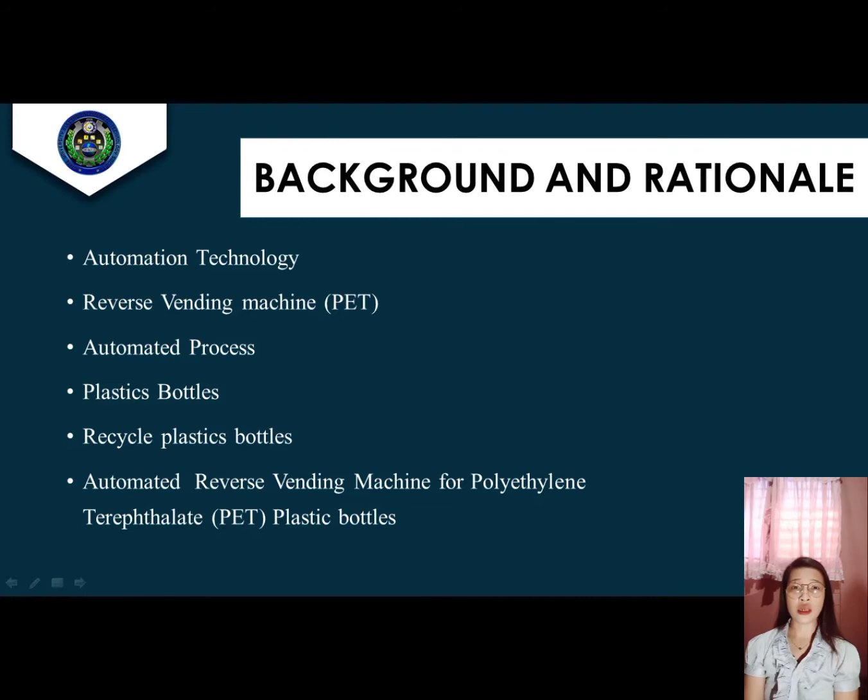Another contributor to the growing post-consumption plastic waste problem is the lack of proper waste management infrastructure. The study highlighted key areas where plastics are leaked into the oceans, and this includes rural areas that do not have a proper waste collection method due to low waste density, and high-density urban areas that are not able to cope with the influx of development.

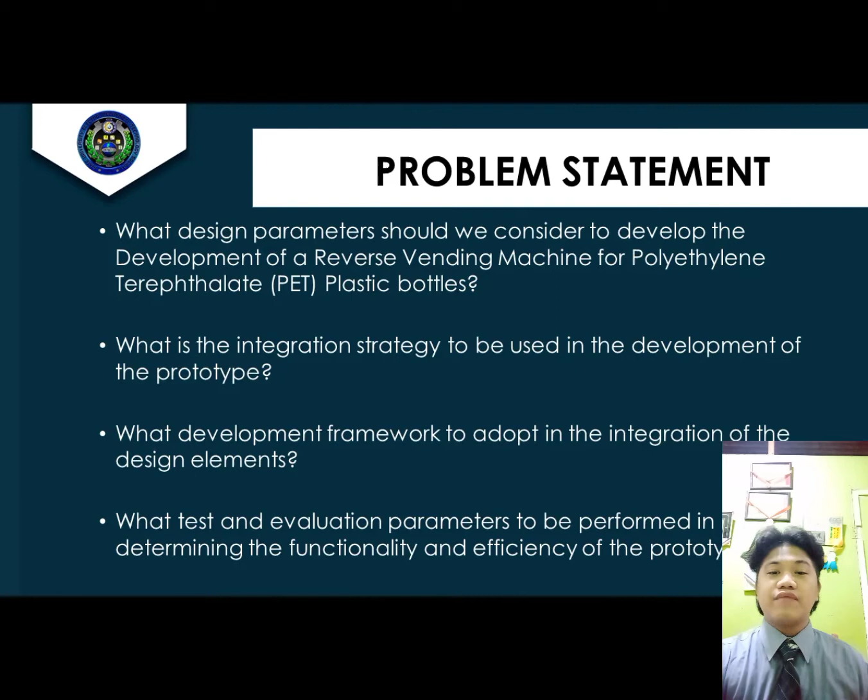Statement of the problem: What design parameters should we consider for the development of a reverse vending machine for PET plastic bottles? What development and implementation strategy should be utilized to ensure the development of a reverse vending machine for PET plastic bottles? What evaluation parameters should we assess in order to measure the performance and acceptability of the development of a reverse vending machine for PET plastic bottles?

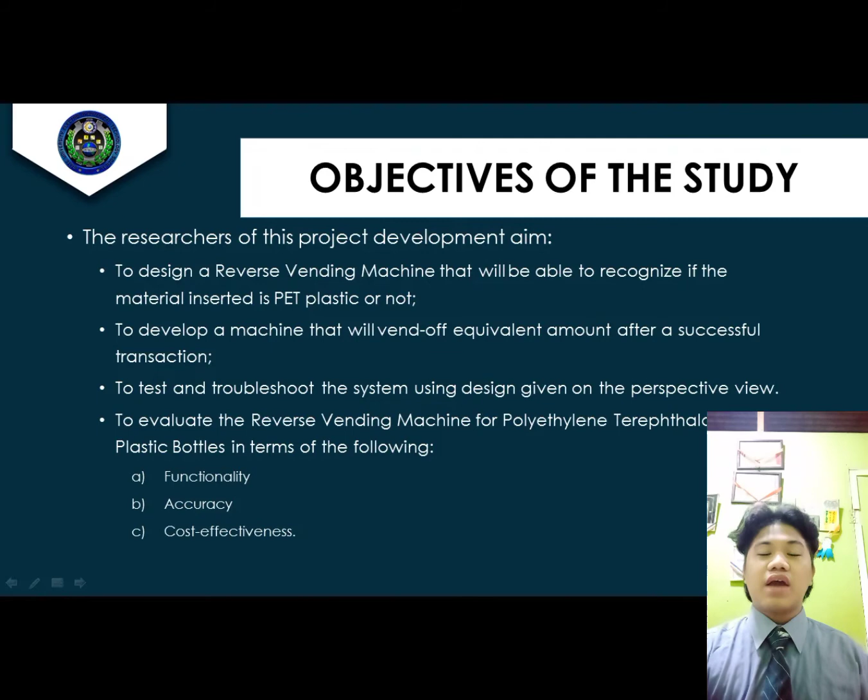Objectives of the study: To fulfill the main objectives, the following specific objectives should be met. To design a reverse vending machine that will be able to recognize if the material inserted is PET plastic or not. To develop a machine that will vend off an equivalent amount after a successful transaction. To evaluate the reverse vending machine for PET plastic bottles in terms of: A. Functionality, B. Accuracy, C. Cost effectiveness.

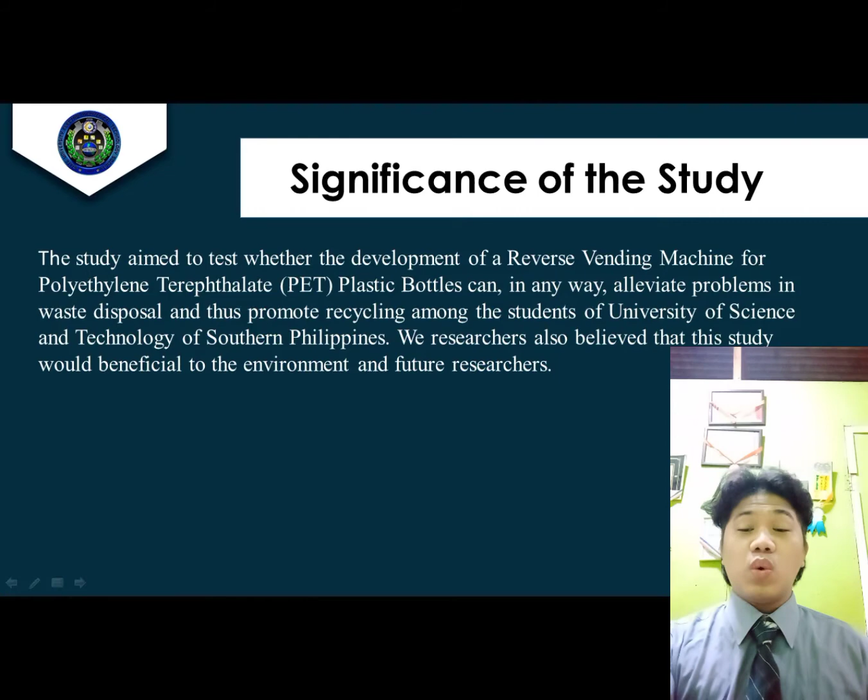Significance of the study: The study aimed to test whether the development of the RVM for PET plastic bottles alleviates problems in waste disposal and thus promotes recycling among the students of the University of Science and Technology of Southern Philippines. We researchers also believe that this study would be beneficial to the environment and future researchers.

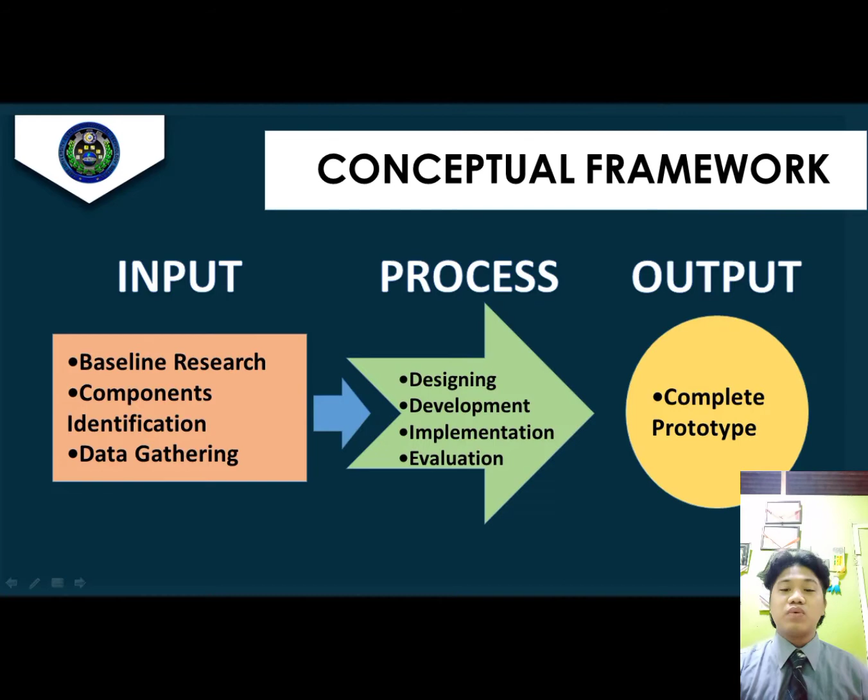Conceptual framework: This is our process flow, which has an input—determine all the possible materials and equipment to use, collect all materials and equipment, gather all data of materials and equipment; a process—design the RVM, applying various procedures as guidelines, develop a prototype for the RVM, evaluate the RVM; and output, which is a reverse vending machine for PET plastic bottles.

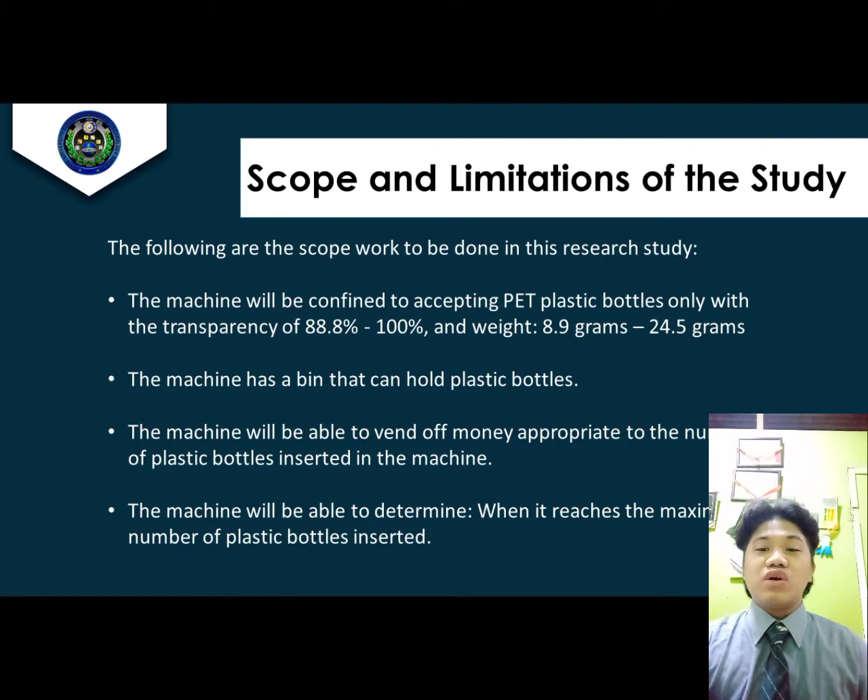Scope and limitation of the study: The machine will be confined to accepting PET plastic bottles only, with transparency of 88.8% up to 100%, and weight 8.9 grams up to 24.5 grams. The machine has a bin that can hold plastic bottles. The machine will be able to vend off money appropriate to the number of plastic bottles inserted. The machine will be able to determine when it reaches the maximum number of plastic bottles inserted.

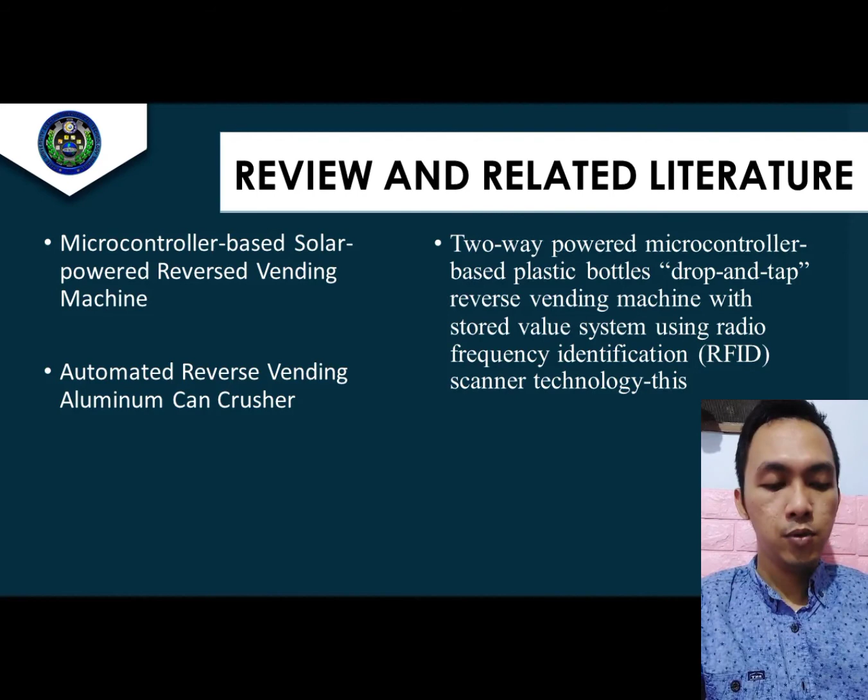Review of related literature: First is the local studies—microcontroller-based solar-powered reverse vending machine. This project consists of a PIC16F84A microcontroller, two proximity range sensors, and a solar power system. The microcontroller is programmed and activated by the two sensors simultaneously.

Next, we have the development of a reverse vending machine using recycled materials and an Arduino microcontroller. At the University of Science, Malaysia, they developed a vending machine. Its function is to separate different materials found in waste streams and minimize the amount of goods sent to landfills. Chapter 3 is all about the research methodology.